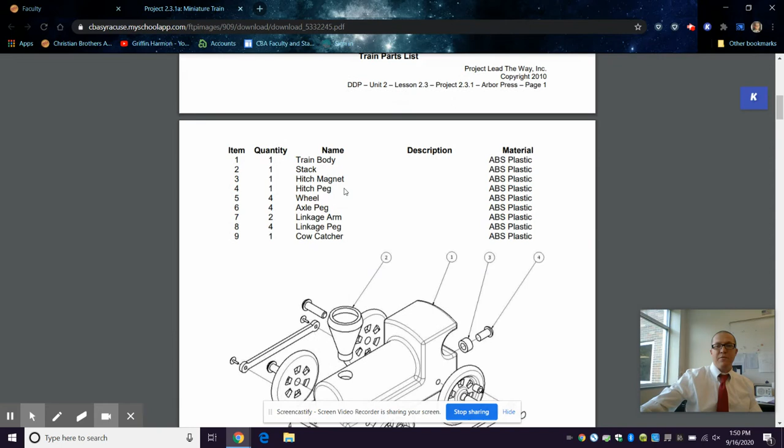So the idea here is to replicate all of these train parts. You can ignore the paragraph. Believe it or not, that list is kind of helpful just to make sure you've done everything. So there ends up being 9 pieces. You can see the assembly there. You guys see how it all goes together?

That's the point. No, I just wanted to say that on film. All right.

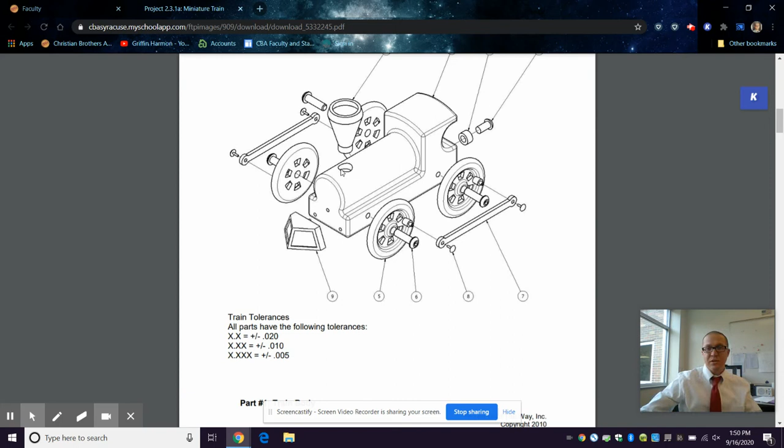There's the train there, full assembly. It's got 9 pieces. You don't need, if it's the same piece and it's put in there 4 times like the wheels, you only model it once, obviously, right?

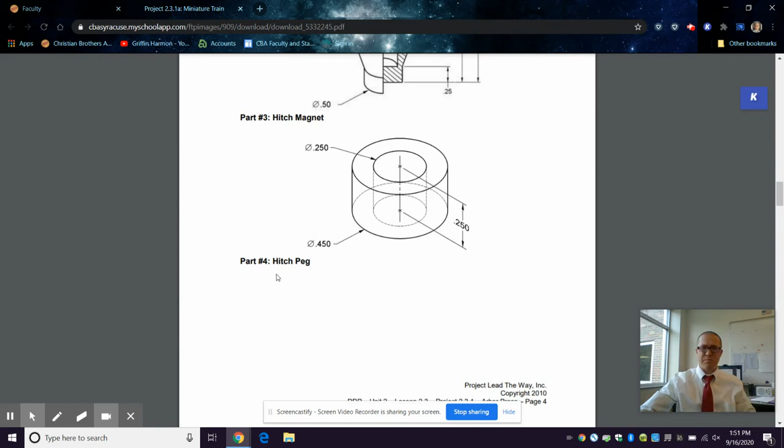You start with a train body and you go from there. Everybody does the train body first. Some of these pegs here, this is, the pages are kind of messed up. This is part 4, the hitch peg. That's actually this one. These are actually a little harder to make than you think.

This arc up here, this is not a fillet. You don't do a fillet. You actually want to draw this shape and then revolve it. But you get to figure out that arc is a little bit tricky.

I'll probably demonstrate that one. The wheel too, that one's a little tricky as well. That one starts with a revolve by drawing this shape here, the cross-sectional shape.

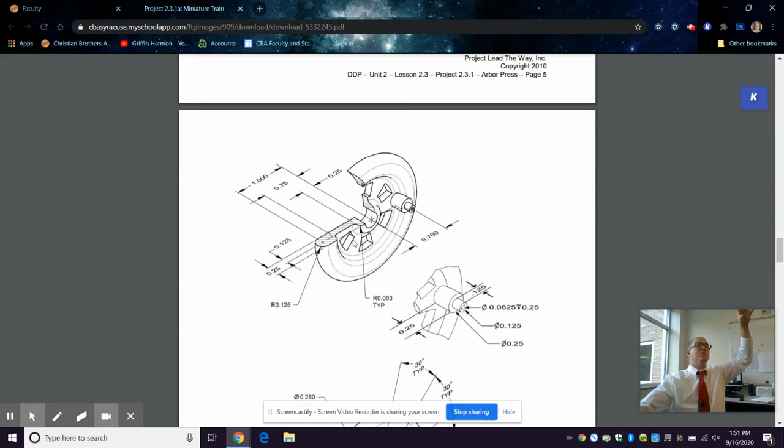All right, my in-class people, you should be paying attention. This is for you guys really. I'm just recording it to post for... No, I know, but try to follow along with it.

So this cross-sectional shape here, you're going to draw that and revolve it around an axis, offset a little bit from the axis, and put the peg.

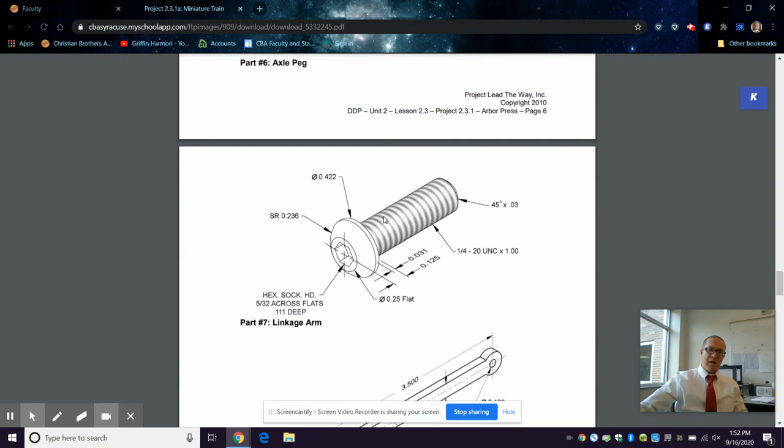I definitely recommend starting with the train body. The cow catcher, you're going to make that shape. That's going to require a loft.

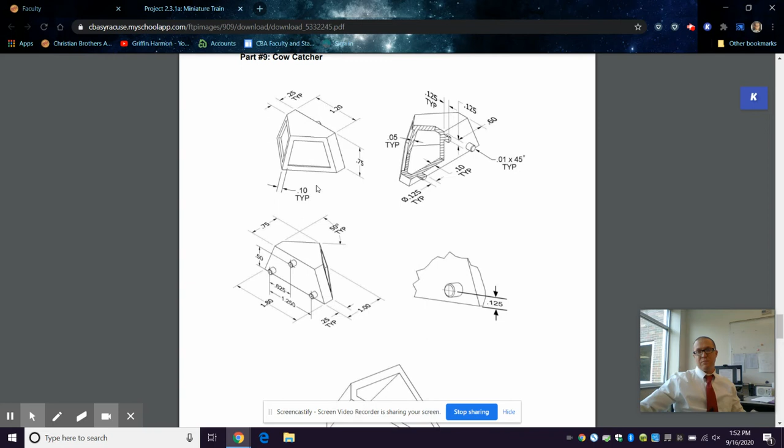Some of you may not remember how to do a loft, we'll have to go over that. So we're going to loft it, shell it, and then do some of the other stuff. So you actually shell it the second step after you loft it and make the solid. So you get that open thing going there.

And then you assemble it, which is going to be another video. So this will probably take a couple videos to get this going. All right, so this will be the intro.

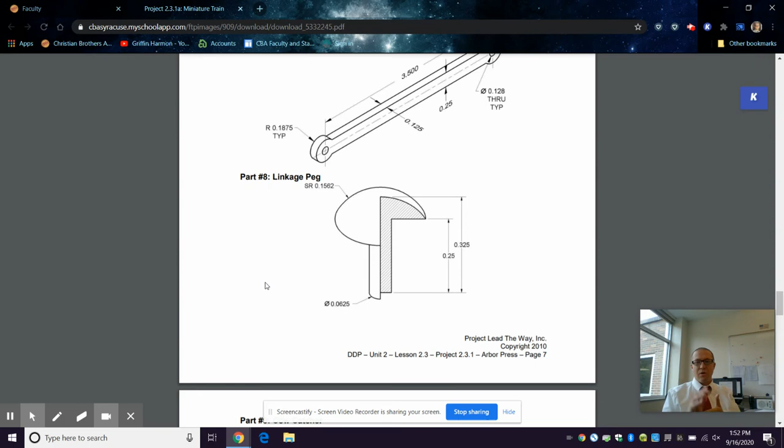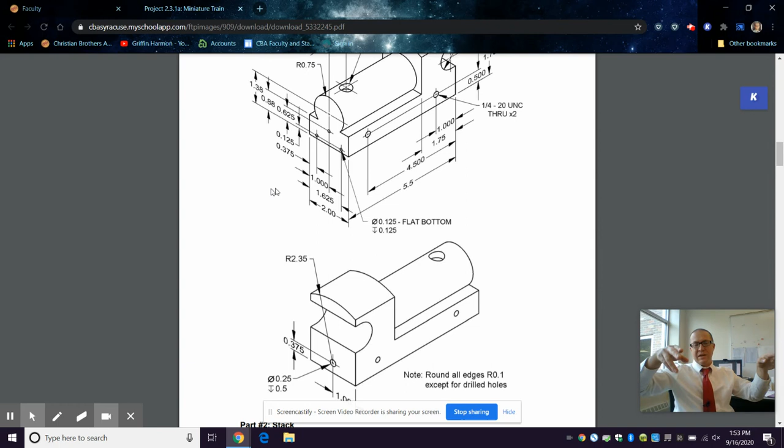A couple things on the train body to point out. That back arc, right? You're going to make basically an L first and extrude that. And then you need to round off the top of the L from the back of it. And if you see, there's a little hole for a peg, for the attachment, magnet peg.

And that little hole is 0.375 inches from the bottom. And then basically you're going to do a cut extrusion to cut off the top of the train. And the radius of the circle you use is going to be 2.35 inches.

I'll probably make a video of that operation and post it. I might get a few parts together and make one video that kind of shows tips on a few different parts of the trickier parts. But see what you can figure out.